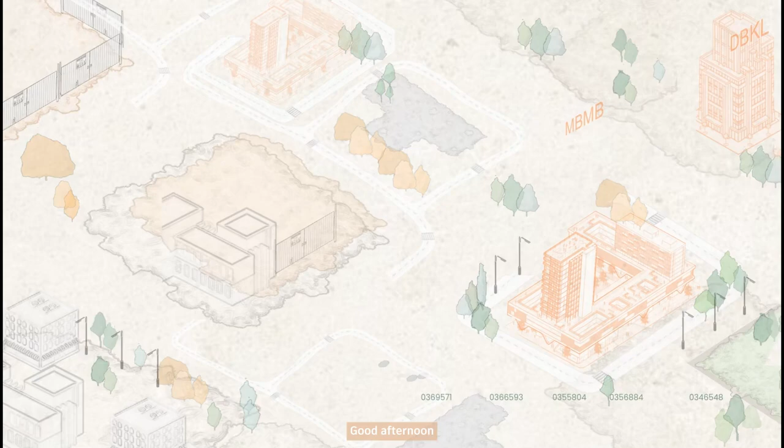We'll be presenting Building Plan Submission and the Certificate of Completion and Compliance (CCC) under the Uniform Building Bylaws 1984, together with a focus on the application to heritage sites using Malacca as our case study.

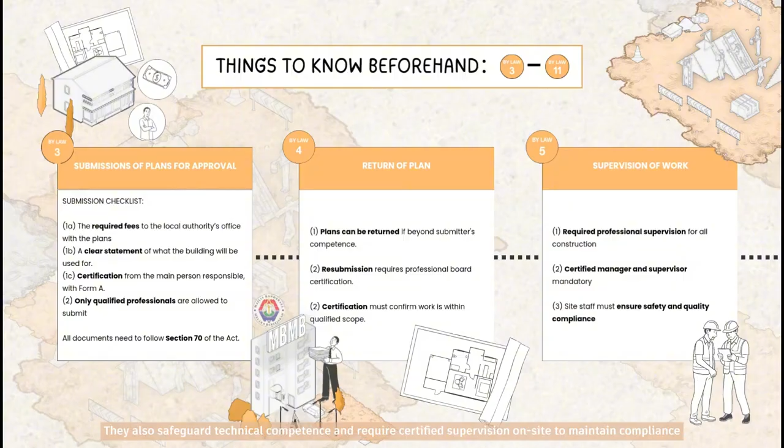Let's start with the fundamentals, Bylaws 3 to 11. These ensure only qualified professionals, the PSP, can submit plans acting as a legal declaration of intent. They also safeguard technical competence and require certified supervision on site to maintain compliance, safety, and quality.

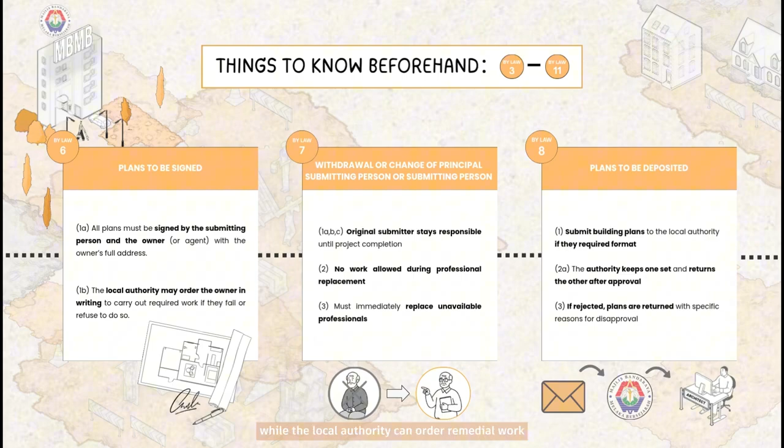These cover legal accountability and record keeping. All drawings are legal contracts signed by the PSP and owner. While the local authority can order remedial work, plans must follow format requirements, with approved copies kept and rejected ones returned with reasons. These ensure clarity and flexibility.

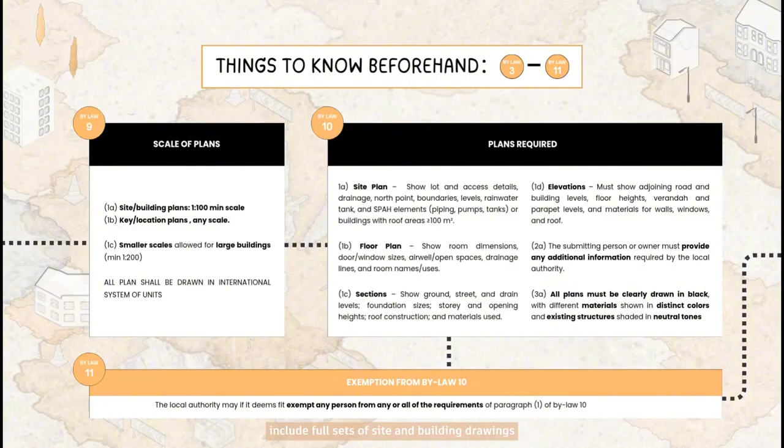Plans must meet scale and metric standards, including full sets of site and building drawings, and the authority may waive certain details for minor works. These bylaws form the foundation for a legally compliant design process.

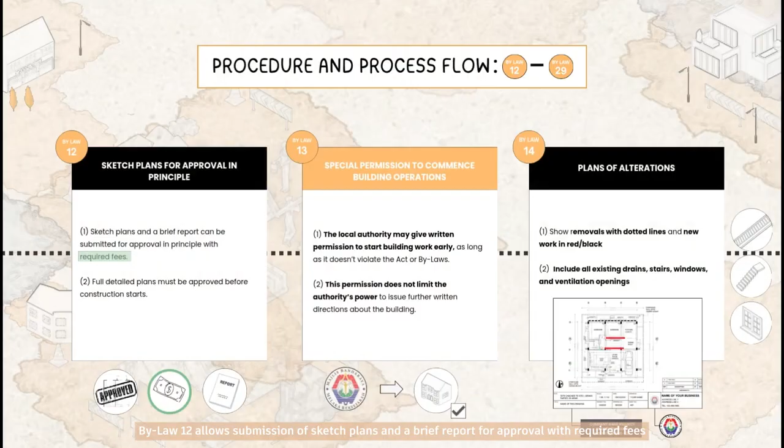Bylaw 12 allows submission of sketch plans and a brief report for approval with required fees, but full detailed plans must be approved before construction begins. Bylaw 13 permits the local authority to allow early construction if it doesn't violate the Act or bylaws.

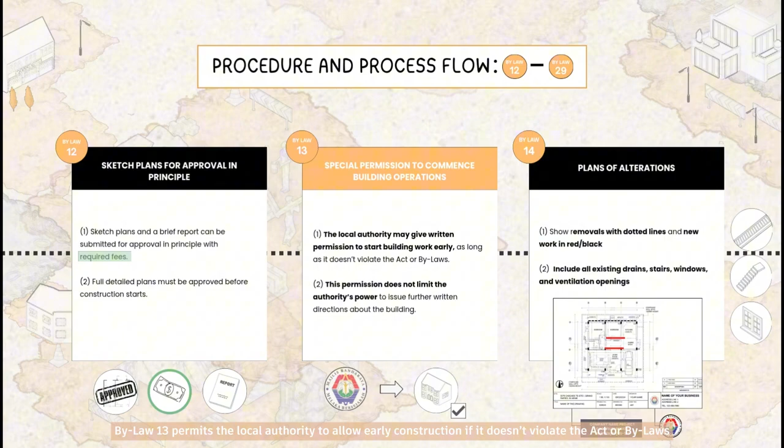Bylaw 14 requires alterations to show removal in dotted lines and new works in red or black, including all existing drains, stairs, windows, and ventilation openings.

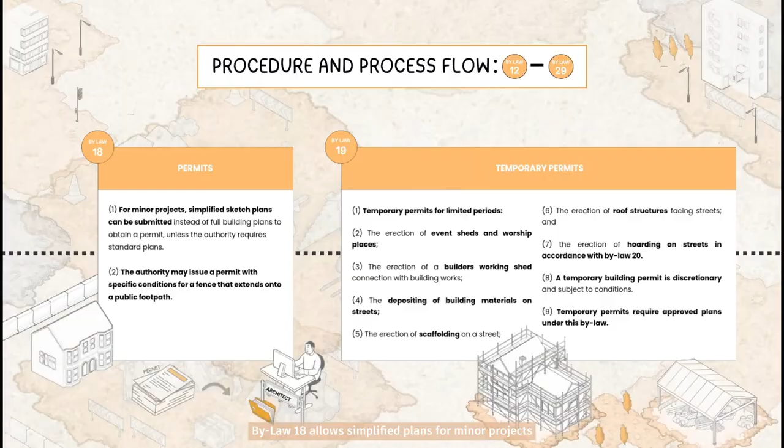Bylaw 15 to 17 cover requests for material specifications, submission of structural plans, load calculations, compliance certificates, and rejection of non-compliant plans. Bylaw 18 allows simplified plans for minor projects, while 19 to 20 regulate temporary permits for sheds, scaffolding,

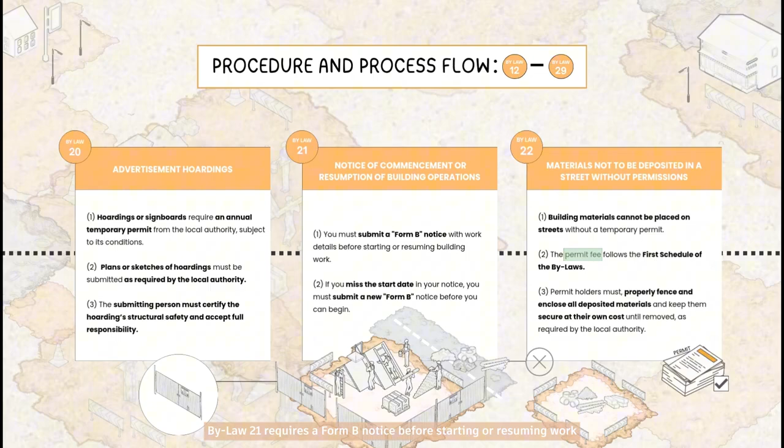events, and advertisement hoardings. Bylaw 21 requires a Form B notice before starting or resuming work, and 22 prohibits placing materials on streets without permission, with permit fees following the first schedule.

Bylaw 25 concerns issuing the CCC once all safety and technical conditions are met.

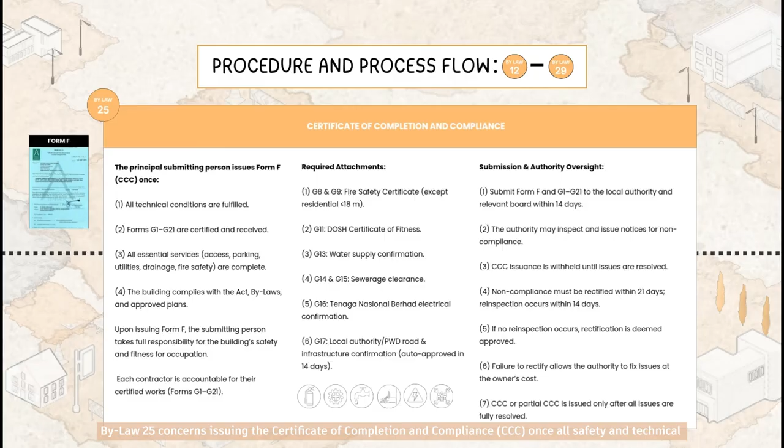Certificate of Completion and Compliance CCC Guide. The CCC confirms a building is completed according to approved plans and meets all health, safety, and utility standards.

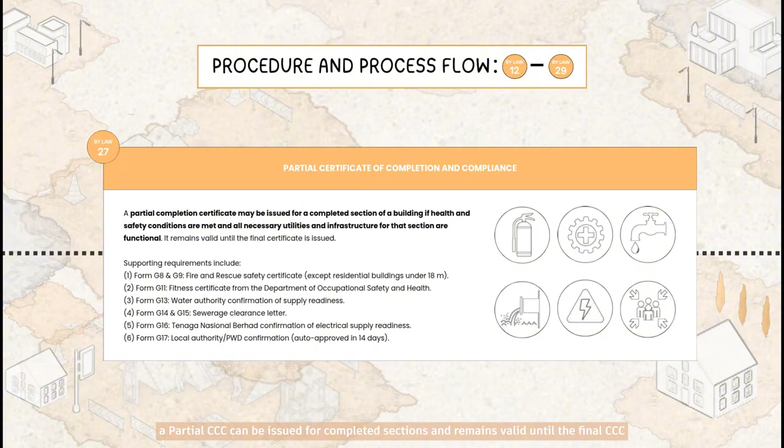Under Bylaw 27, a partial CCC can be issued for completed sections and remains valid until the final CCC. Under Bylaw 28 and 29, the principal submitting person must submit the CCC, comply with authority notice, and pay all fees listed in the first schedule.

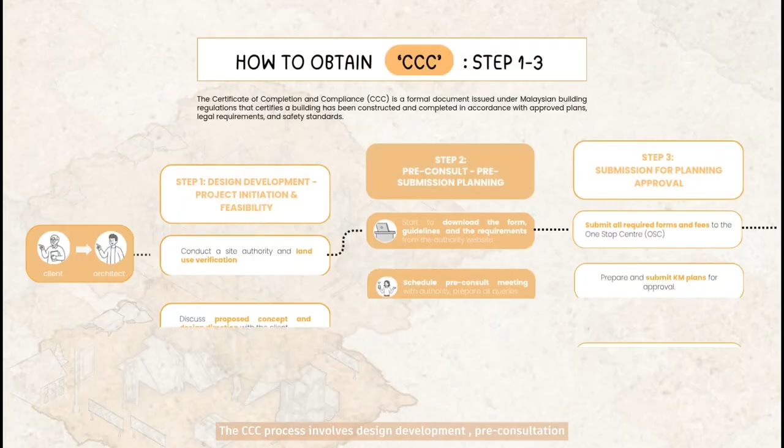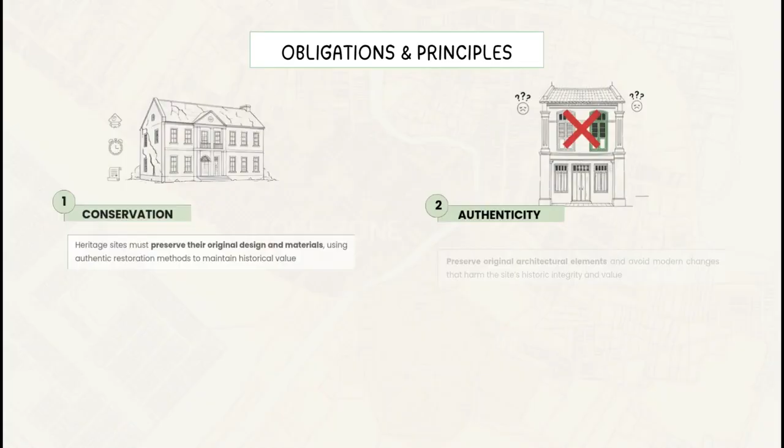Now let's focus on the obligations and principles that safeguard the Malacca UNESCO World Heritage Site. Here are the 5 key principles in heritage site preservation.

First, conservation to preserve the original design and materials using expert methods. Next, authenticity to maintain historic truth by using original elements and consulting historians. Third, management to enforce strong legal frameworks, monitored with modern tools like GIS and a dedicated management unit.

Fourth, sustainable use to keep sites functional and alive, ensuring they remain culturally relevant for the community. Lastly, stakeholder involvement to actively engage locals, experts, and authorities in the decision-making process.

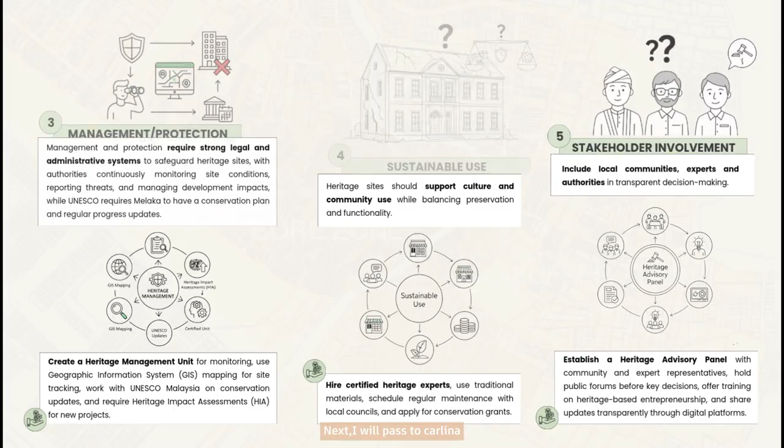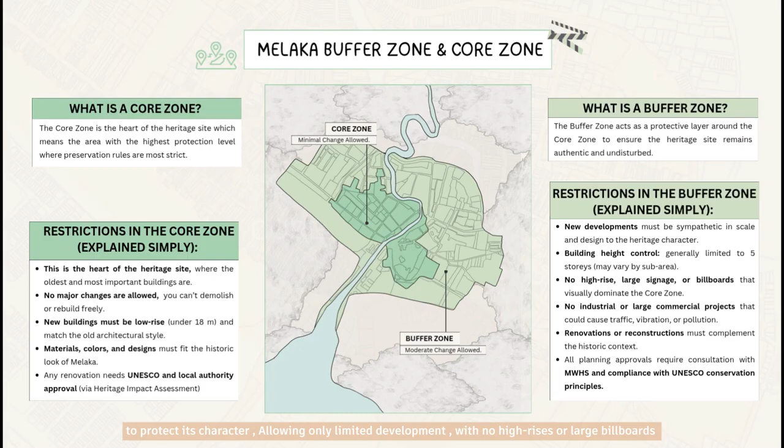The buffer zone surrounds it to protect its character, allowing only limited development with no high-rises or large billboards. All works must follow UNESCO conservation principles and the Malacca Heritage Enactment 1988.

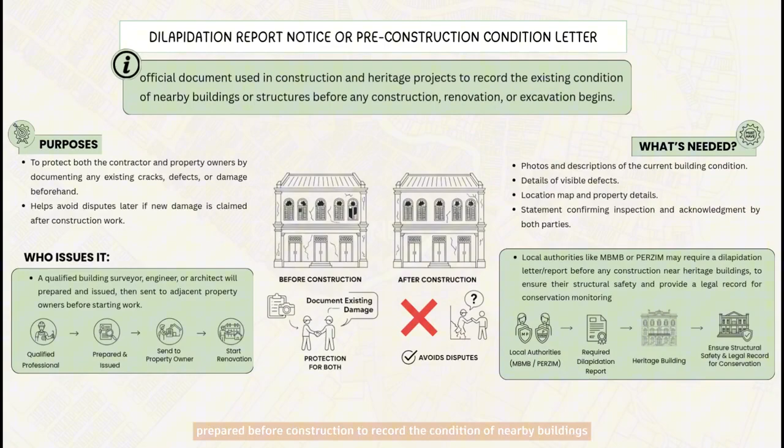This slide explains the dilapidation report, prepared before the construction to record the condition of nearby buildings. It helps prevent damage disputes between contractors and owners, prepared by a qualified professional.

It includes photos and defect details. Authorities like MBMB or PERZIM require it near heritage sites to ensure safety and proper conservation record.